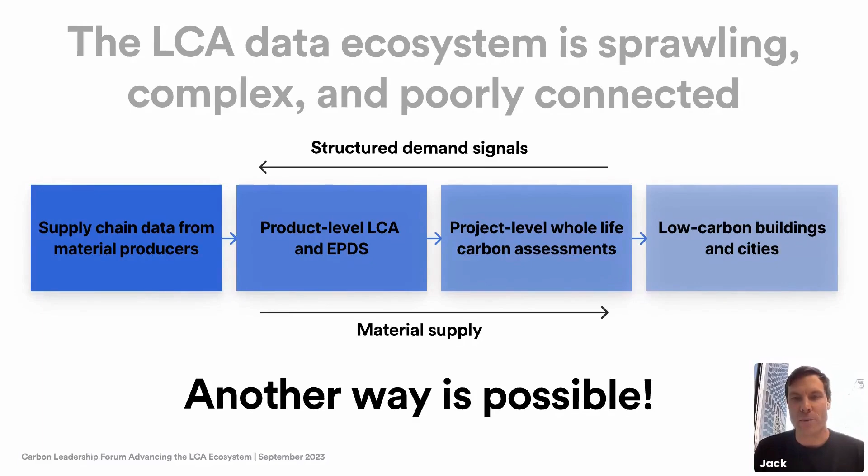These four steps in this process illustrated here are represented by the four panelists that I'm really excited to share this webinar with. I'll give brief introductions before diving in.

We have Ben Christensen, the CEO and co-founder of Cambium, the supply chain technology pioneering robust digital infrastructures for urban wood waste. Alex Cooper, the co-CEO and co-founder of Pathways, an AI-enabled platform to accelerate material decarbonization through product lifecycle assessments and EPDs. Rebecca Riss, the performance director at OPN Architects, and myself at C-Scale, leading whole life carbon assessments for buildings.

So over the course of our presentations, we'll walk you through that data landscape and how by connecting product and building decarbonization, we can not only create a healthier and lower carbon built environment, but also de-risk important parts of both the material procurement and construction processes.

With that, understanding that there's a lot of stakeholders present on stage, we imagine there's also lots of different folks represented in the audience. And the first poll we'd like to run is: who are you and where do you come from? What part of this value chain do you represent?

Seeing some votes rolling in. As these votes roll in, I'm going to take another look at the chat.

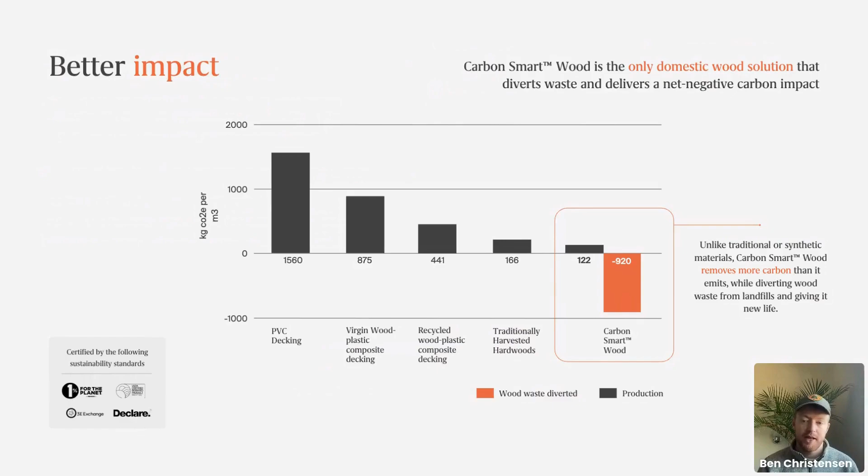The last piece is really being able to deliver better impact. Our material is much lower carbon than traditionally sourced harvested material, or a bunch of the recycled plastic alternatives we're often competing with in outdoor use cases. So there's a much bigger opportunity to really scale that impact overall.

We are huge believers that sustainability starts with stronger supply chains, and that as material companies, the more we can couple the financial asset—that transaction between somebody with a tree, to a trucker, to a sawmill, to a manufacturer—if we can participate in that, we can provide dynamic data for the end customer that ultimately delivers better pricing, better impact, and a better experience. That's what we're all about, and we're really excited to continue the conversation today.

Ben, thanks so much for sharing that.

Before I dive into Pathways, I'll share a bit about what Pathways does. But I think one of the things we see is that with better data, users don't have to see a trade-off between sustainability and cost. In fact, sometimes those things can go hand in hand. I'm curious, whether within your own operations or with customers you've worked with, if you have examples of how having that deeper understanding of supply chains and greater visibility into what you're actually using has changed behavior, to drive sustainability goals and or economic goals?

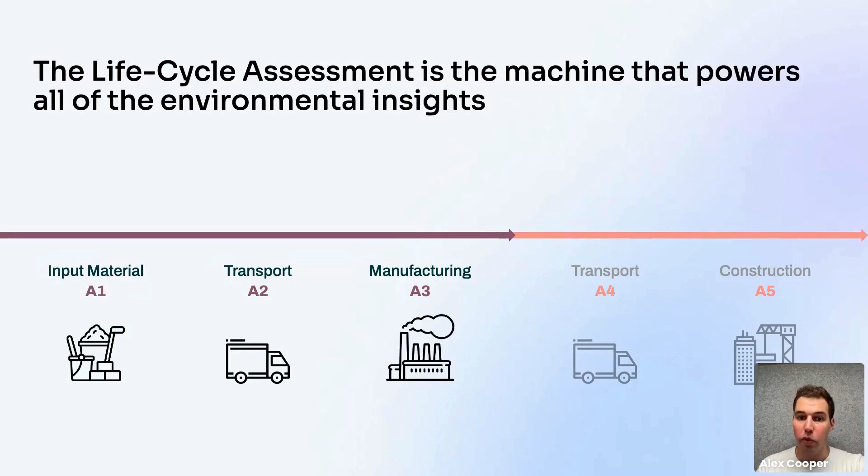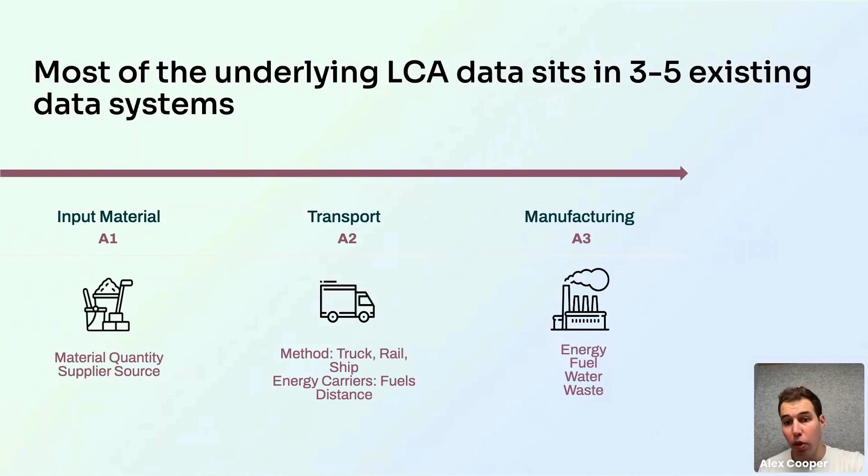And so that's where most of our focus is. So we do a couple of different things. We integrate directly with production and procurement and operational data systems to gather this information. And then we work with unstructured data as well, which often comes in a variety of different forms.

And that's sort of one of the core innovations that we've brought at Pathways, is how can we take all this information, which often already lives within our customers' ongoing production and operational processes, and just make it easier to pull it all together and structure it in a way that they can engage with and think about.

And so, as you might be unsurprised to learn, a lot of times this can involve bringing a lot of unstructured data and putting quite a bit of structure around it.

Historically, this work has been, the burden of all this has been put on the manufacturers. And so they might work with an LCA expert or some sort of third party to create that one-time point-in-time environmental product declaration, but all of the work was put on the operators.

And so even if they were finding these EPDs valuable, and I was heartened to see at the beginning of this call that people saw that they did have value, when it's so difficult to go and gather all the data to publish those EPDs, they become deprioritized. It's just too much effort.

And so again, that core focus of ours has been how do we go and take all of the data that exists and then model it in a way that both helps our customers publish EPDs and make decisions.

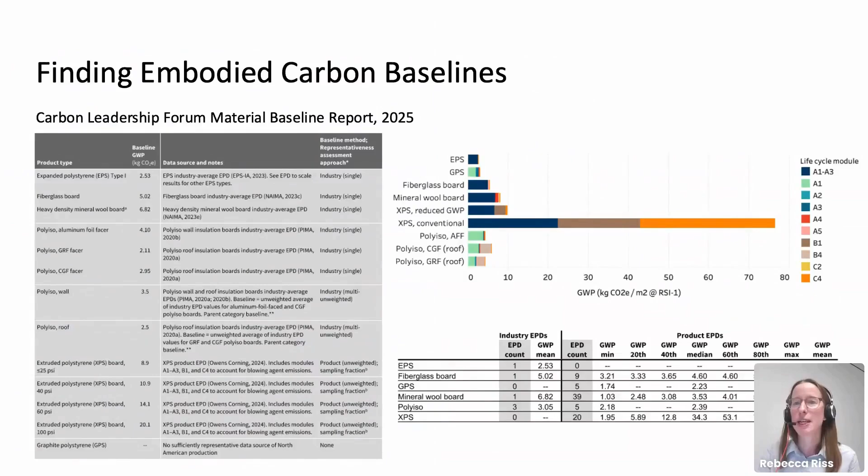First, to understand embodied carbon baselines and the general availability of embodied carbon data for various product types, I frequently reference the material baseline report developed by the Carbon Leadership Forum. CLF published an update to this report just last month, which I highly recommend checking out.

We also frequent Building Transparency's EC3 site to find environmental product declarations and sort products by embodied carbon intensity. And I find Sustainable Minds as a helpful resource to see embodied carbon performance alongside material ingredient performance. But there are many resources out there, and I'd say use what works best for you.

When thinking about how I'm going to use product data, I find it helpful to put the data into context by asking how much data is available for this product type overall, and is there limited data available where I should just be asking for more information? Is industry-wide data available where maybe that next step is to ask for more product-specific information? Or is there plenty of product-specific data available already from a wide range of manufacturers?

So I'll be walking through a few examples of how we have established product criteria, starting with CMU. There's a range of embodied carbon criteria that we can set for a product being used on our projects, ranging from disclosure criteria, where we require third-party EPDs of various types, to optimization criteria, where we set limits on global warming potential.

Back in 2023, there was no industry-wide US data for CMU, so no clear US baseline, and in general few CMU products had product-specific EPDs. Given the level of available data, we were able to explore requirements for product-specific EPDs on projects with clients that had low embodied carbon goals and were willing to take on that additional cost premium associated with being more restrictive on what CMU they were sourcing. But it was difficult to make a product-specific EPD for CMU baseline criteria across our projects.

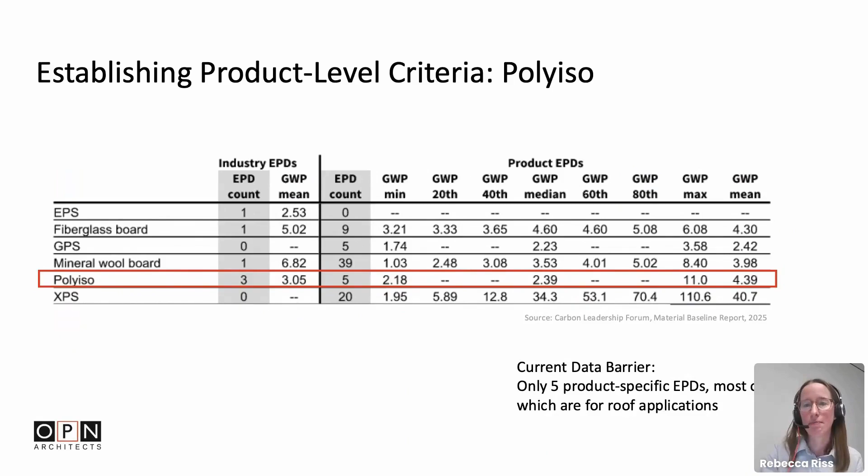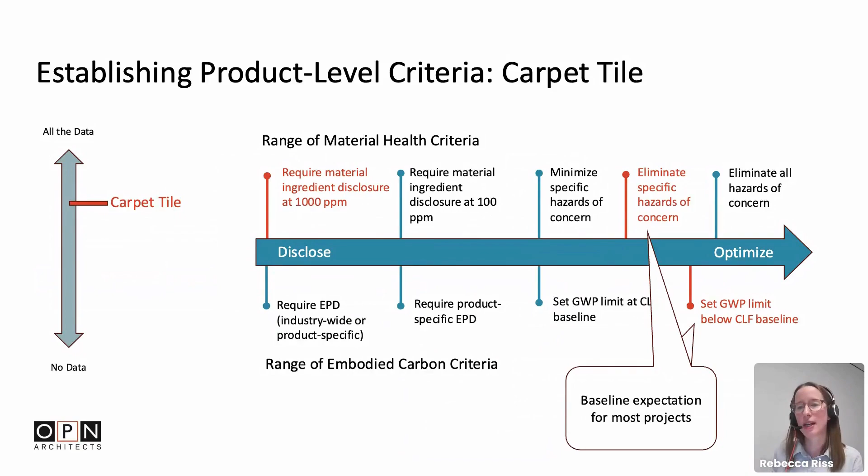The final example for products that I wanted to share is carpet tile. Thankfully, there's a lot of data available on carpet tile across multiple product lines and numerous manufacturers. This higher level of data availability enables us to eliminate specific chemical hazards of concern, like PFAS, from our carpet tiles, while also setting low GWP limits well below the industry baseline.

So once we've established the criteria we're going to set for various product types, factoring in the type of data available, we then need to integrate those requirements into the project specifications. This is a critical step in the design process. Thankfully, there are multiple resources and examples available on the Carbon Leadership Forum and the Building Transparency websites.

At OPN Architects, we've been refining our specifications to include embodied carbon limits and restricted ingredients, and found these particular resources to be a great starting point. I also encourage teams to include these performance criteria as baseline expectations on projects, regardless of whether the project is pursuing a sustainability certification.

Now, stepping back and going up a level, all of this product data also drives decisions at an assembly level. There are a couple of ways we typically use data at the assembly level. Early on, when weighing pros and cons of different assembly options, it's helpful to compare example assemblies. One great resource for this is Payette's Kaleidoscope tool.

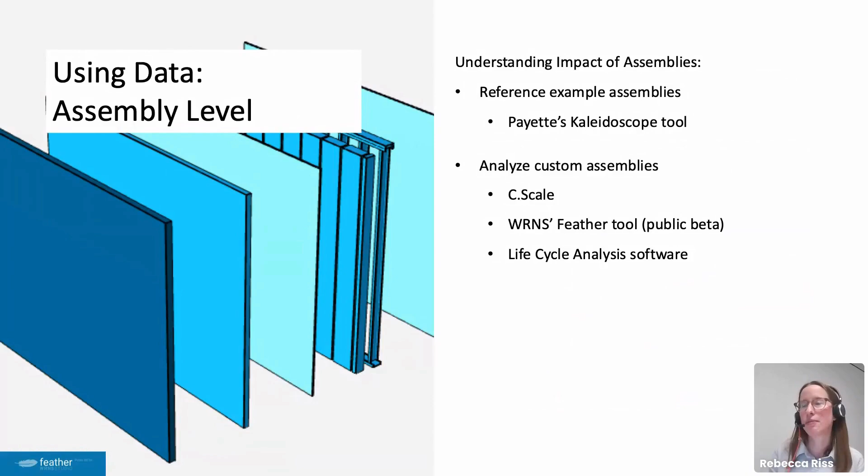We can also analyze our proposed design assemblies using a range of tools that vary in complexity, including C-Scale, the Feather tool, and other life cycle analysis software. Here's one example of how we've tested optimizations at the component level for an exterior brick and metal stud wall using WRNS's Feather tool. We're able to quickly understand the drivers of embodied carbon in the wall assembly and study the carbon impact of different insulation strategies and stud wall configurations.

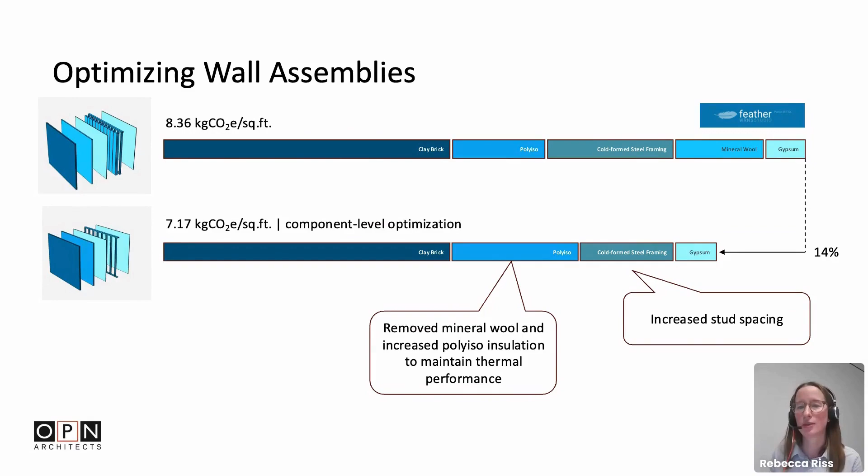So in this example case, we can propose an option with a 14% reduction in global warming potential. And then outside of the tool, we can also test product-specific optimizations that further reduce embodied carbon, in this case by 20%.

Here we studied lower carbon options that used product-specific EPDs for cold-formed steel framing as well as gypsum. But given the lack of product-specific EPDs for brick and polyiso, it's been difficult for us to optimize these products at that product level for embodied carbon, which is especially unfortunate here since you can see for this particular wall assembly, those two are the largest contributors to embodied carbon.

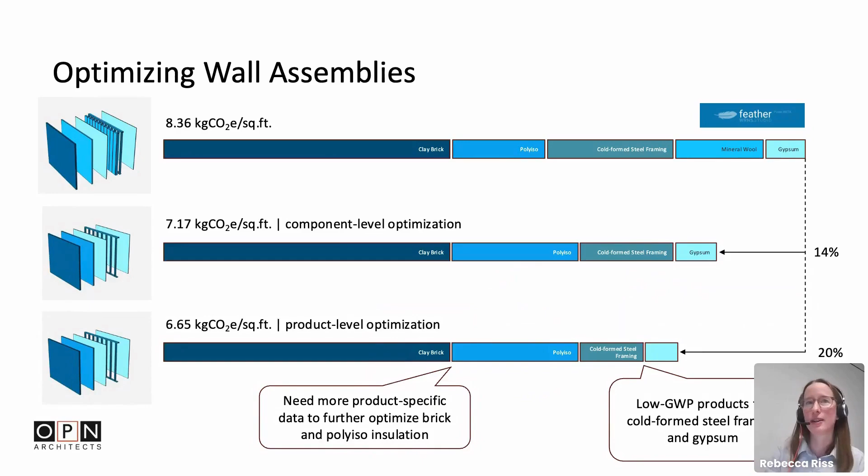So I hope this just helps highlight why it's so valuable to advocate and ask for more product-specific EPDs so that we can continue moving the needle on these products that are lacking some data.

And finally, product data helps inform our design decisions at the building level as well. So a great resource to help put your carbon reductions into context is the Carbon Leadership Forum's whole building LCA benchmark study. And we also have the ability to analyze the embodied carbon of our proposed building designs in various tools such as C-Scale and life cycle analysis software.

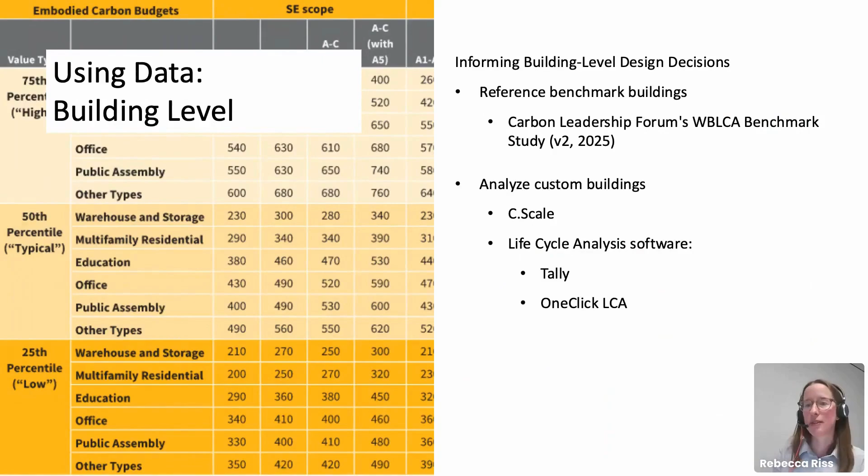All of these building level resources depend on a robust set of product level data to feed into them. And these building level tools are also extremely helpful for us to put carbon reductions into context and emphasize opportunities for further reductions. So with that, Jack, I'll pass it off to you.

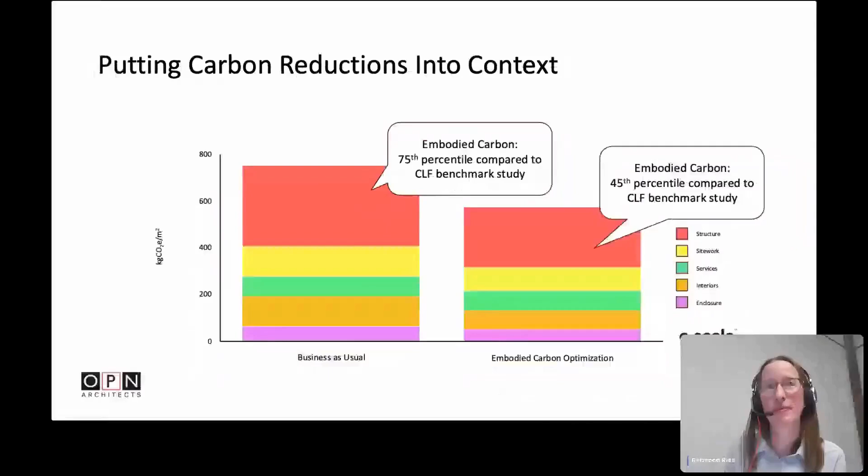Thanks, Rebecca. Really cool to see the work happening at OPN, in whatever small way we can, try to support it. When I think about a firm like OPN, you're one person at a much larger firm. There's obviously a lot of expertise in you in these topics. How do you in your work scale this practice and this expertise laterally across the firm to make sure that this happens not just on projects where you can dedicate 20 hours a week, but on all the other projects as well?

Yeah, it's a challenge that a lot of people in my role at architecture firms deal with. And I've found success in focusing on a few projects at first to develop a process and workflow that works for our project team that we're all comfortable with, and being open to adjusting that process based on their feedback.

It's also been important to get project team members engaged and encourage them to take ownership on specific initiatives. As you mentioned, I can't be on all projects at once. So by having team members develop the skill set to comfortably lead that on a project and then take it to their next project is valuable.

And we also try to communicate the project successes along the way to spread lessons learned from project teams and build more awareness and interest, so that as we start with a few projects, we can then scale those practices up to more projects across the firm.

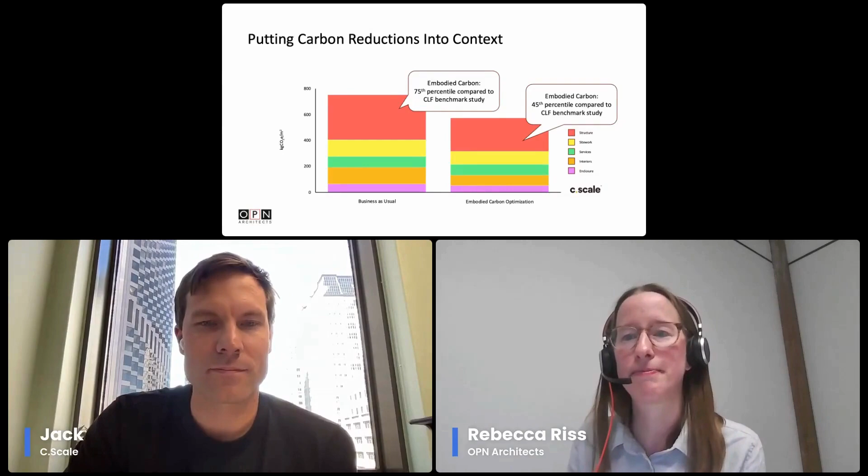Awesome, thank you. Well, maybe I'll take that as a transition into the work that we're doing at C-Scale. One of our major focuses as a company is to scale the practice of whole life decarbonization across the industry, to get more firms involved, and at the firms we work with, to get more projects moving through a whole life carbon reduction process.

We have been around in different ways for a few years, but really an independent entity building C-Scale since January of this year. And in the last 6 to 7 months, our enterprise customers, the range of firms we're going to have modeled over 900 projects representing almost 100 million square feet of construction.

We're incredibly proud of this, to be supporting so many projects in their decarbonization journey, and are really looking to continue as we grow as a company to scale our support, do more detailed analysis to move these projects forward. But really, so much of the work we do is thinking on the margins.

What's going to get the next designer on board? What's going to get the next project that wouldn't otherwise be able to do this analysis, to be able to go from 0 to 1, and then we can scale from there.

With all these projects coming through, over almost half of them have set explicit emission reduction targets. The goal is not just to measure the emissions, the goal is to do something about them. We're looking to build C-Scale into a concept-to-construction platform to plan and execute whole life carbon emissions.

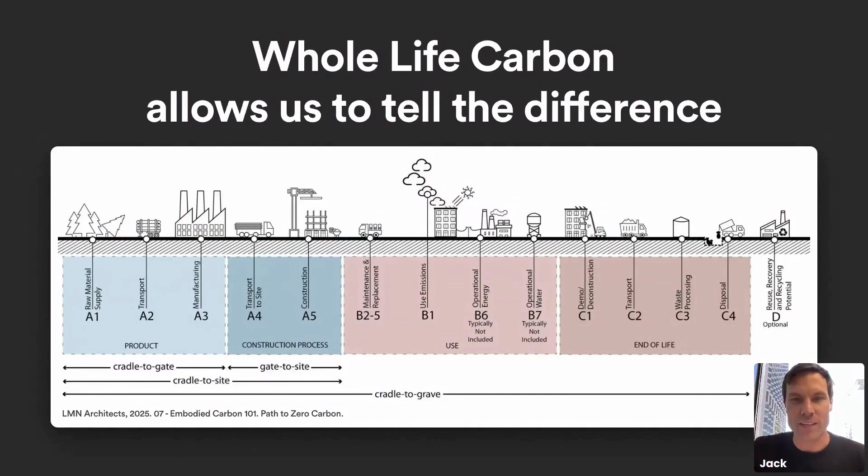So when we think about whole life carbon assessment, to give it a definition, it's a holistic description of the environmental impact of the processes and materials utilized over the building's lifetime, trying to look at processes and materials together to understand the building.

The goal of tools like C-Scale is to support this by giving designers the right data at the right time to support the right decision. Early in the process, this means identifying hotspots and setting goals. Then you add a little more resolution, determining schemes and systems. You continue to refine the model, get into assembly, and start to look at materials. At the end of this process, you're working to procure materials.

The goal is to build meaningful tools that target not just reporting and compliance, but also real reductions across the design process. The goal of C-Scale is to get started as early as possible and really shape the way the project comes together. We're not the only ones thinking about the LCA process in this light.

One firm we have the honor of working with is KPMB in Canada. They published an amazing document classifying LCA at different levels of resolution across the process. I can't find the link right now, but maybe someone has it and can share it. It's really been an inspiration for us.

I think there's a lot of leadership on this topic coming from the firms we work with and others as well. We're just there to scale those approaches, these good ideas that come out of practice, and make them more accessible to more people.

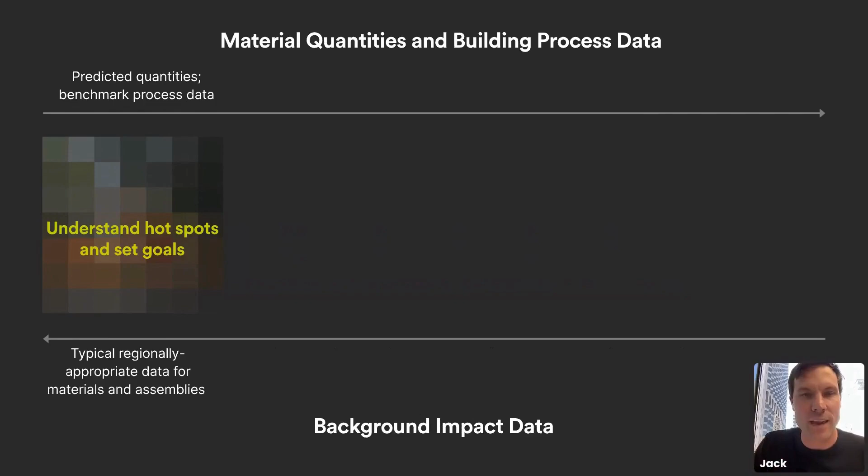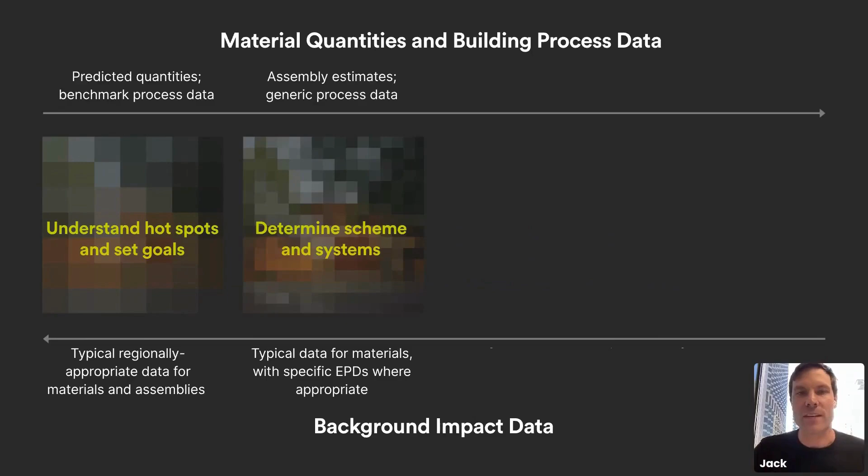As the building evolves, we're moving into assembly estimates, more generic process data, using some specific EPDs where that's available or meaningful, and otherwise typical data.

As the resolution starts to evolve and we're making more specific decisions, we've gotten the big pieces in place: detailed quantities from BIM, more modeled process data, and we're really starting to fold in EPDs at this stage to target products, get them into specs, and then fill gaps in the data with baseline or generic data as appropriate.

And it really is only by the time we're starting to procure materials and we're in the construction process that we're trying to use EPDs everywhere possible, because at that point it's meaningful to specify a certain EPD, since we know it's going to be that product and not another product. We're using as-built quantities and measured process data everywhere that it's meaningful to do so.

Now, obviously, we're building these whole life carbon assessments on top of a very uneven data ecosystem. EPDs are not available for every product. Process data, for things like construction processes, is not available or as often collected as we would like it to be.

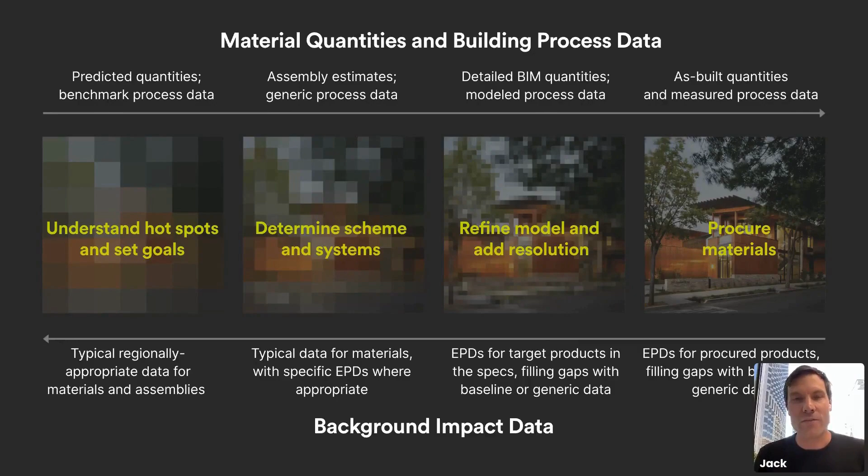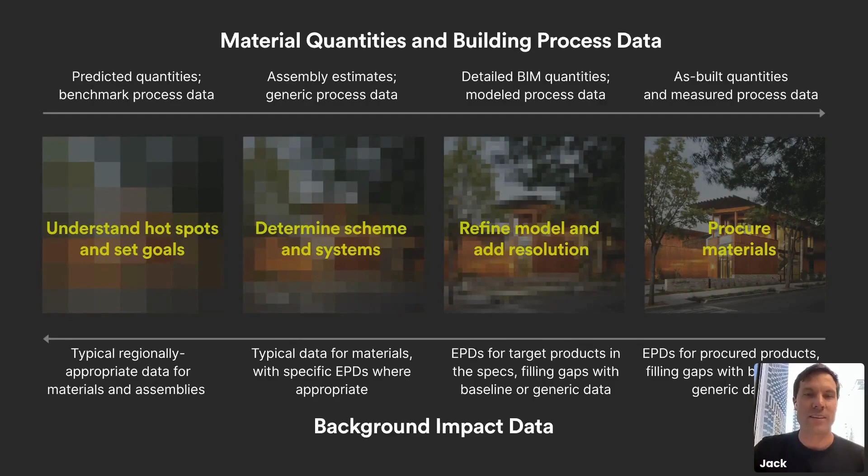One thing, a sneak peek of where we're heading on the back end, is trying to understand how these different sorts of data and the uncertainty related to them affect the range over which these estimates function. So we're trying not only to manage this data across the process, but manage the uncertainty inherent in this data across the design process.

What designers need to know, the feedback we get, is they're trying to make decisions between scenario A and scenario B. Should it be mass timber? Should it be steel? Should we use a brick rain screen, or a ceramic rain screen? With these sorts of decisions that people are trying to make, there's uncertainty about the decision. If you're using an EPD, there's relatively less uncertainty for that product-specific EPD than there is for a generic data point, or a data point you had to pull from another country to fill the gap.

This management of uncertainty across the design process is, for us, something really essential to provide at the building scale, because it ensures that when people are making decisions or comparing scenarios, they understand that when they claim a reduction of one scenario against another, it's actually significant, and not just coming out in the uncertainty between two options. Our goal as we move further forward is to manage uncertainty across the project delivery process, to collect the data related to quantities and processes, and allow that to be a live understanding of where uncertainty lives and how people manage that, because this not only helps understand the meaningful decarbonization choices, but also helps de-risk the project delivery process.